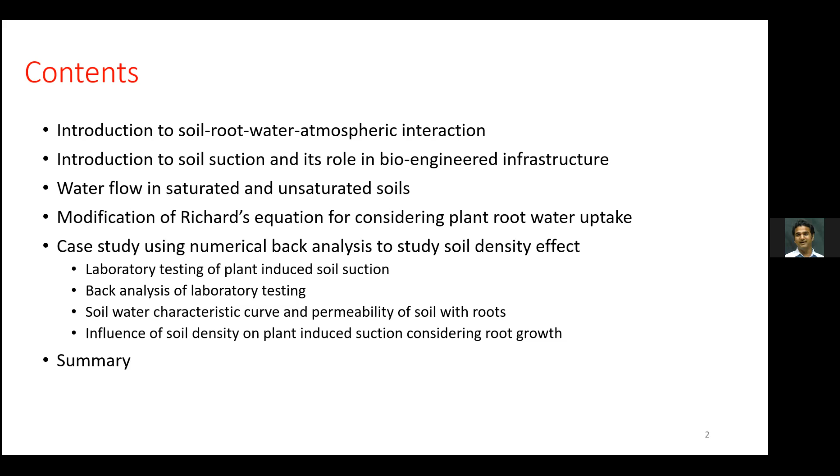Okay. So within this part, I will discuss about this numerical back analysis and a little bit mention about how one should be very careful when we conduct this analysis, and how we can obtain parameters which are not directly available, I mean, you can get it from literature. And then I will summarize my work. So in soil plant water atmospheric interaction, we are looking at how water flows in this entire system, including soil, then plant and atmosphere. So you can see vegetation through its transpiration can drive the water flow in the soils.

So if we look at this part,

Dr. Madhulisa. Yes. So the annotation is not allowed, is it? Annotations means like to use the pen or the marker. Okay, I can see here on the bottom.

Yeah, it's okay. Okay, so usually with this transpiration, what I was telling, this process is very important because we have all understood this process maybe in our high school or in biology class. So this transpiration is the loss of moisture through leaves, which happens in the atmosphere. And this transpiration creates a hydraulic gradient, which will help to move the water from, you can say, stem to the leaves, and then from root towards the stem, and from soil towards the roots.

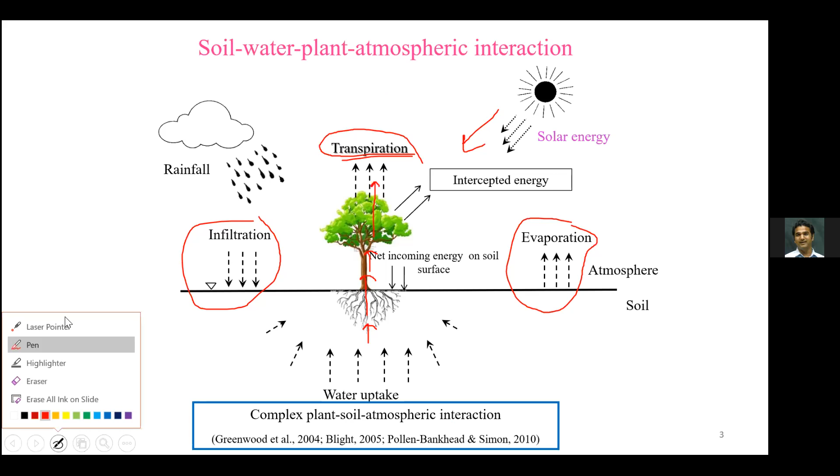Even in the lab, it's very hard to make a fully saturated specimen because we need to apply back pressure to remove any air or dissolved air in the soil. So that's why most of our soils in real life are unsaturated. And in unsaturated soil also, if you look at this part where the root zone exists, what we are looking at here is how we can model this interaction.

Okay, so people from agriculture have tried very simple root water uptake models to model how water will be taken by roots and will be lost to the atmosphere by transpiration. So in this root zone, how we model transpiration or root water uptake is something I will discuss in this particular lecture. And also we will go through some basic terminology, which is very important.

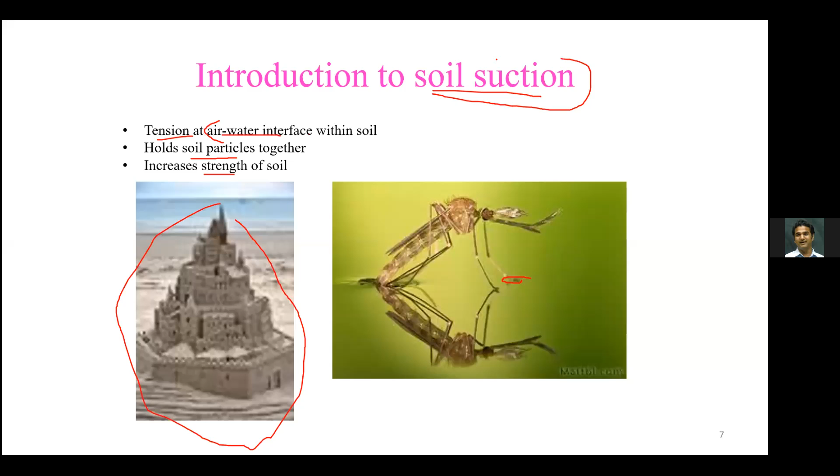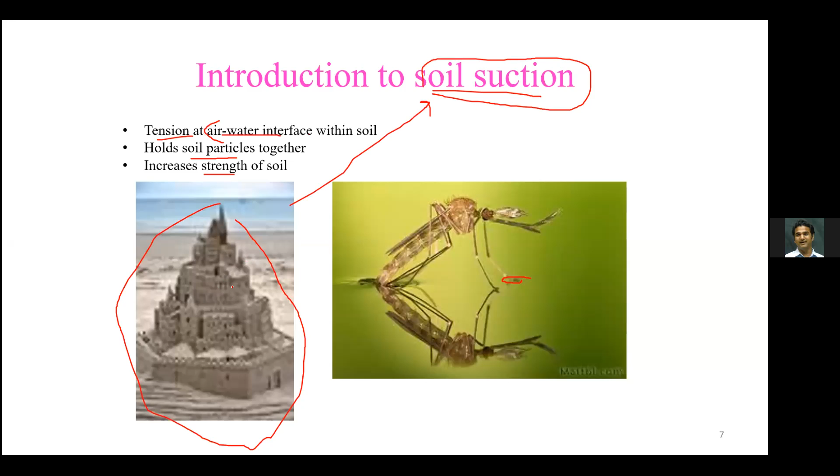A very classic example is the sandcastle. If you put a lot of water on it, it will collapse, right? Because as I said, the water which is required to make it 90 degrees or to make it strong is not the bulk water. It's this capillary water. Remember, this capillary water is something which is very, very important in our unsaturated soil mechanics.

If you read books from agriculture, soil science, geotechnical engineering, I can tell you all of them tend to use different types of words for the same thing. Like in agriculture, in hydrology, they will use pressure head, or they sometimes even say matric potential head. In agriculture, sometimes it goes towards this tension head also. Okay, and the units also change. Somebody represents in centimeters, somebody represents in kilopascal. In geotechnical engineering, we say suction. Okay, and we represent in form of kilopascal because we are engineers. But in agriculture and all represents in centimeters.

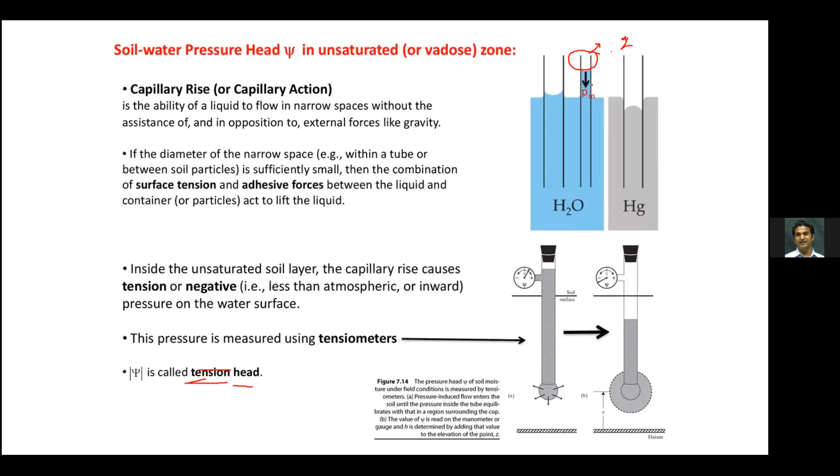So as I said, this sandcastle could stand because of soil suction. This is a very simplified form, for relating using this capillary model. I think you know this. The height of this water in this capillary tube, we can find it by using an equation, which we can say is the capillary model: 2 times tension into cos alpha, we assume it to be 1, divided by radius. So this radius you can assume to be equal to pore radius of soil.

And this has direct use in our unsaturated soil for estimating shear strength. So I think you are aware of the Mohr-Coulomb envelope. The shear strength you can calculate using c and tan phi usually, and your net stress. But when you have soil suction, there is an additional term which is added. There are terms which have been defined by Professor Vanapalli in 1996 and Professor Fredlund from 1995. They're both from Canada. Professor Vanapalli is, I think, an Indian, but he's in Canada. And I think they both were together in the same research group. So that's why you see very similar equations.

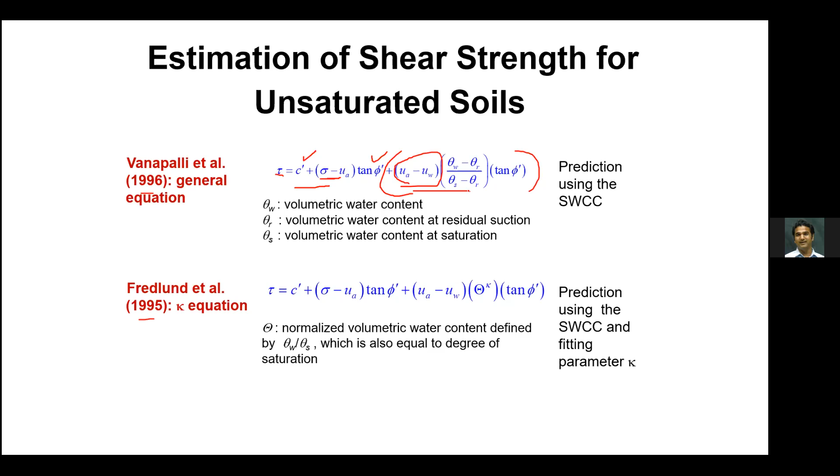So this equation also considers this term suction. So this term is also known as soil suction. And you can use this soil suction to estimate the strength. So you can see with an increase in suction, your shear strength will increase usually. And this term is not permanent. It depends totally on the soil suction which is present in soil. If your suction is zero, when soil is wet completely, if I use simple terms, then this additional shear strength becomes zero. You can also estimate permeability of soil if you know soil suction using this term. So these are all modifications from saturated soils to unsaturated soil, and this is important because we are looking at problems where we need to understand water flow in this zone, which is the unsaturated zone.

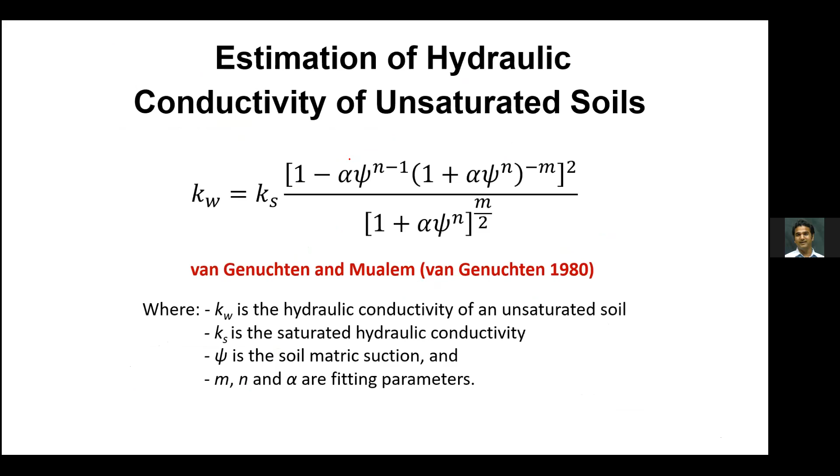Okay. So you can also measure matric suction in laboratory using several instruments, but in the field, we usually go for tensiometers. So this can measure reliably, you can say, from 0 to roughly 80. In the manual, it will be written 90 kPa, but even if you reach 70 or 80 kilopascal, you will see the readings are not reliable. Okay, so I usually use it from 0 kPa, or you can say plus minus.

Okay, so if we use this tensiometer, you can measure soil suction, but if the suctions are very high, especially in clay soils, or when your soil gets very dry, your suction can reach above 80 kPa. Then there are different sets of instruments that can be used. And this is also still a research topic, I would say. Till now, up to date, we don't have one particular instrument that we can use in the field to measure soil suction right from 0 kPa to maybe around 1500 kPa, which is the wilting point of the soil.

So we don't have this long range instrument yet, a reliable one. We have certain instruments which measure soil suction indirectly, or you can deduce it, but it's not very reliable. Okay, you need a lot of calibration. So this is also a research topic which is still in progress, I would say.

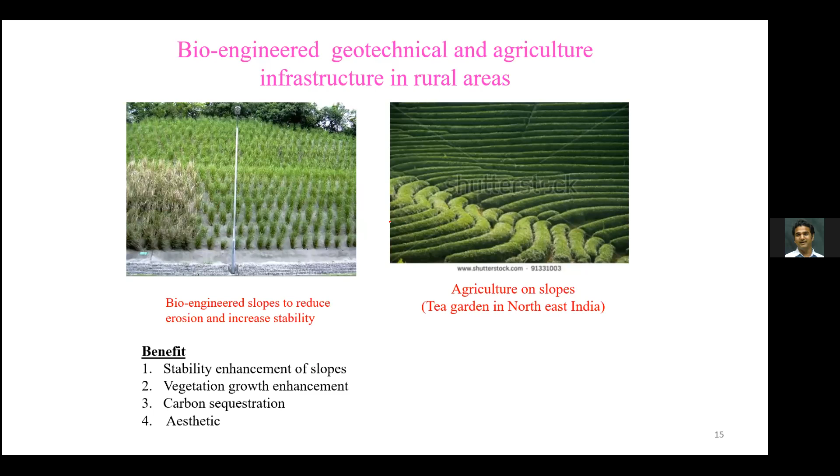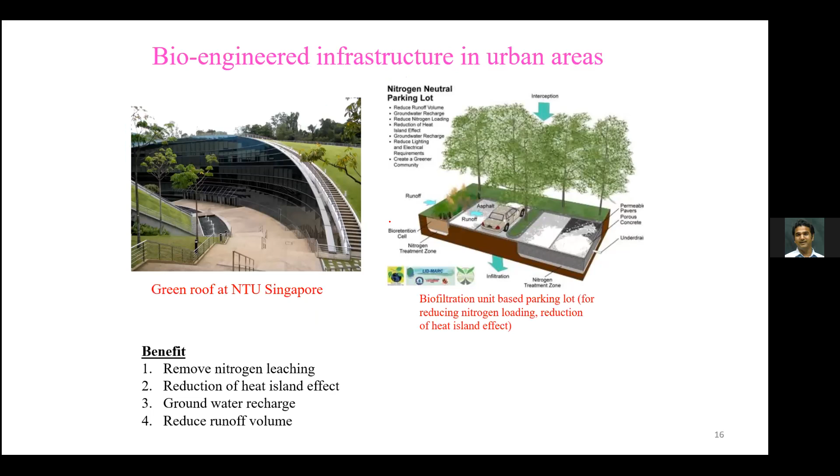Okay. Applications, I think, especially in many hill slopes, or these days in slope remediation, they are trying to use mixed methods where they are also using nailing or concrete mixed with vegetation. And also universities are promoting use of vegetation in a more scientific, more engineered way to stabilize slopes, also provide aesthetic value, and also for water filtration.

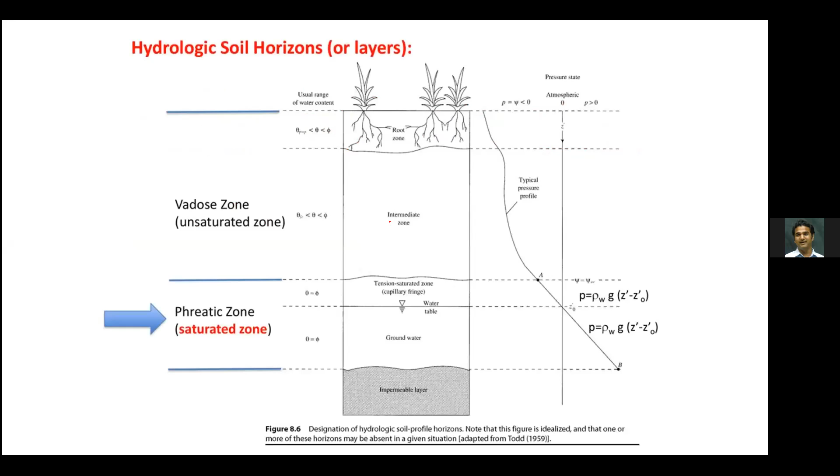Okay. So to understand water flow, we will first go through various models which have been developed. I think in undergraduate we have seen Richards' equation and Darcy's law. So the law governing the water flow through porous medium was discovered by Henry Darcy, a very famous French engineer. I think this equation is well known to most of you.

So if we consider a small soil element and assume it's a homogeneous and uniform element, the water flow through this element can be calculated using this equation, where Q is the unit flow rate, K is the permeability or saturated conductivity, and this term is very, very important. I think this is somewhere where many of us get confused: it is the total head gradient. So this term is not only the pressure head gradient, but it also includes the gravitational head gradient. So remember, this term is the total hydraulic head gradient.

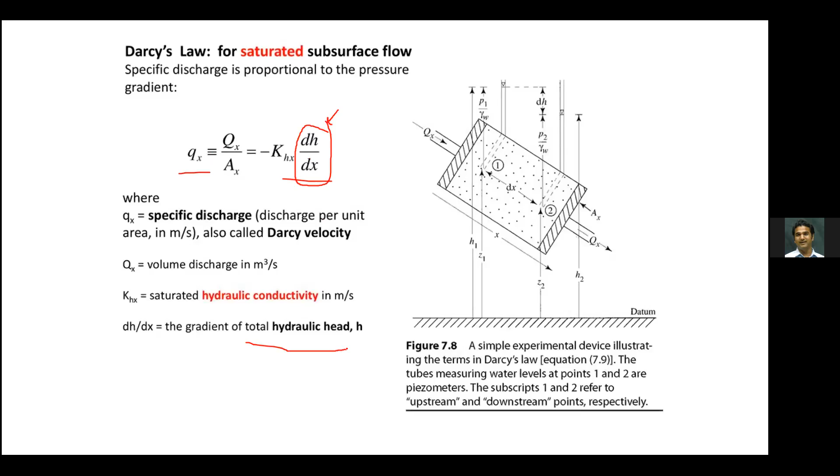Okay? And when we calculate the total hydraulic gradient, it includes gravitational head and pressure head. This is pressure head or suction head, which I was talking about. So we use both gravitational head and pressure head. So it's always better you call it total head. Okay, so you will not get confused. So that water flow rate we can measure using this equation.

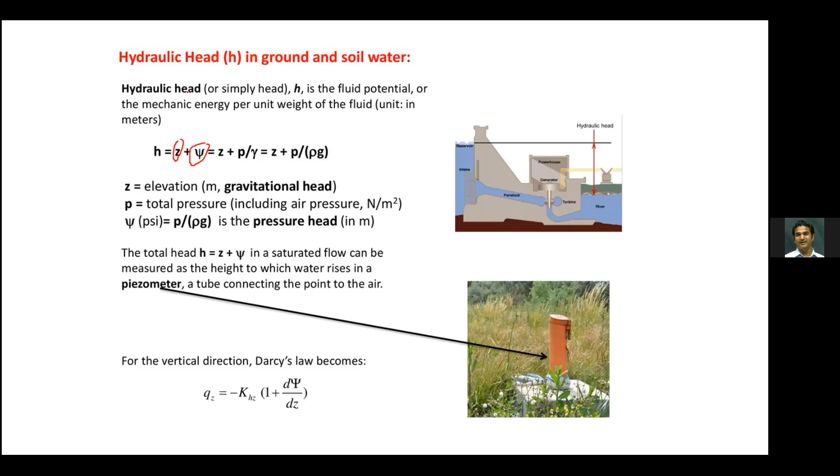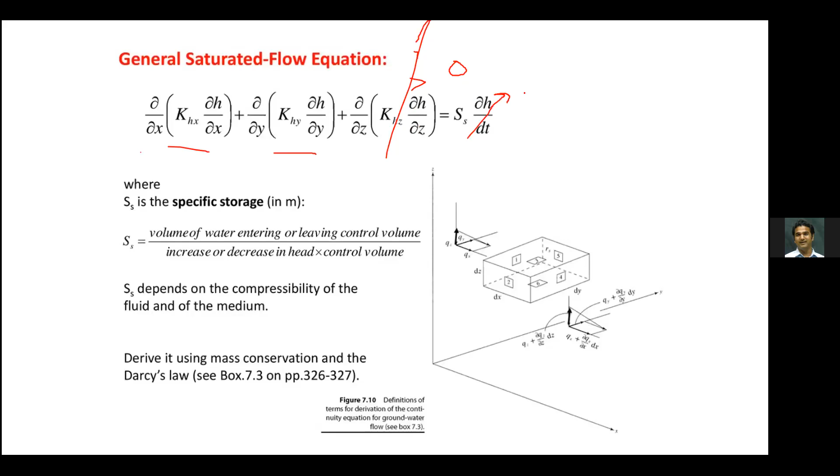Okay, and then there's an equation which can be used for steady or transient flow of water in saturated or unsaturated soil. This is a very general equation in 3 dimensions. So in most of the studies, we actually go for 2-dimensional. I would say even simpler studies are there for 1-dimensional. So this term we neglect always. We assume that the water flow in 2 directions are similar. So in steady flow rate, on the right hand side, the storage will become 0. Okay, so there is no additional storage of water.

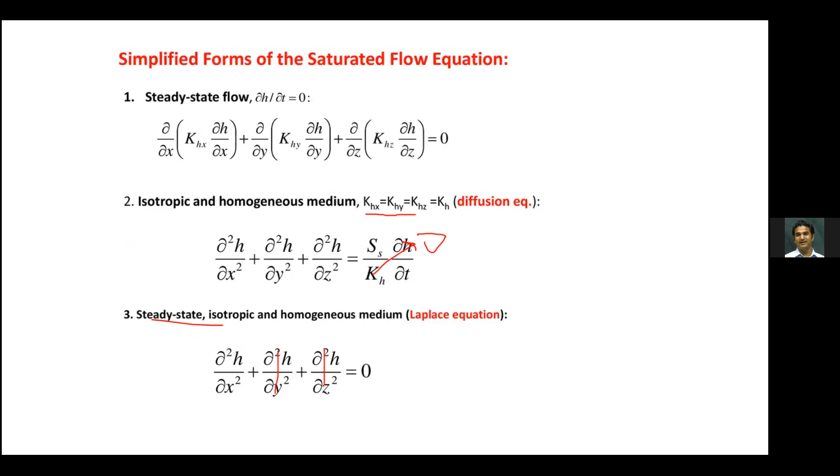In isotropic and homogeneous medium, your permeability in X, Y and Z direction are similar. In steady state isotropic permeability, in homogeneous medium, this term also becomes 0. So you have this term. So remember, in these terms, there is no consideration of vegetation yet or root water uptake. Okay, and if we consider all flow in only vertical direction, then these 2 terms are also 0. Okay, so then you get a simple term like this.

Okay, so now before we go into detail of how to implement, we'll try to understand what is the soil water characteristic curve. So every material, it's not only soil, it can be any porous material, has a characteristic curve. Even our towel. Okay, we use a towel every day, and that towel also has its own characteristic curve. Any porous material has its characteristic curve. Okay, and it's a kind of material property, you can say, in very simple terms.

Okay, let us consider a very wet soil or a very wet towel. In a very wet towel, your water content will be very high, right? So in that case, most of the water will be bulk water, and the amount of capillary water may be very negligible. If your capillary water is negligible, you can assume your suction is very negligible, right? Your suction is very less because your capillary water is very less when your towel or soil is very wet, right?

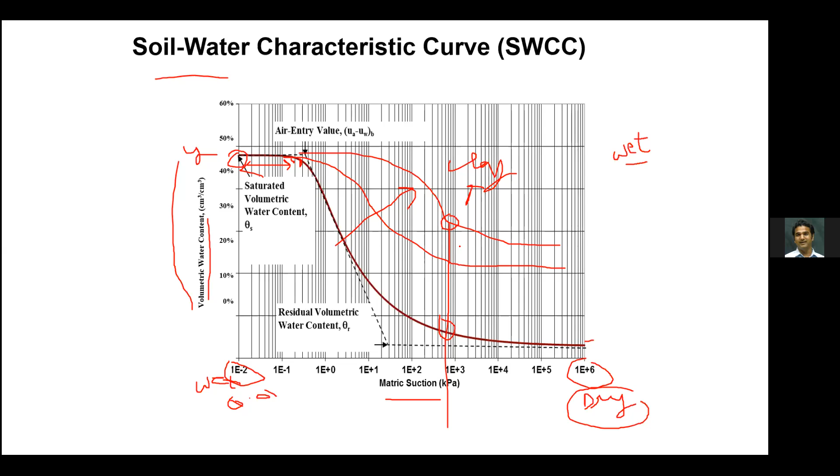Similarly, even napkins or tissue papers or towels also have their own characteristics, and you can determine a similar characteristic curve if you want. And as I said, clay usually has higher water retention as compared to sandy soils. Okay, so you can see the unit here.

This graph is taken from literature in agriculture. They prefer to write in pF units or centimeters of pressure head. But don't get confused, the meaning is the same. You can even convert this into kPa, kilopascal.

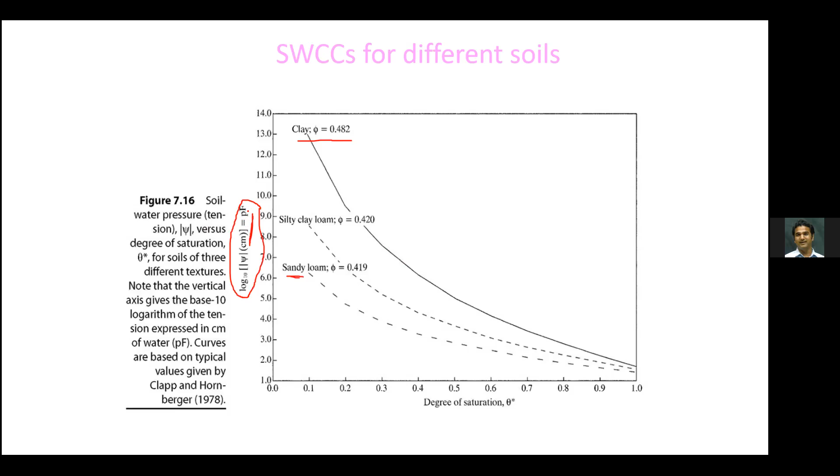Okay, so this is the general equation, we call it the Richards equation, for water flow in unsaturated soil. We can modify it, as I said, using this equation. We modified it by adding a sink term here. Remember, this term represents a change in water storage. So if you add a sink term, it means you are subtracting water: this amount of water change with time represents the amount of water which has been taken by the plant.

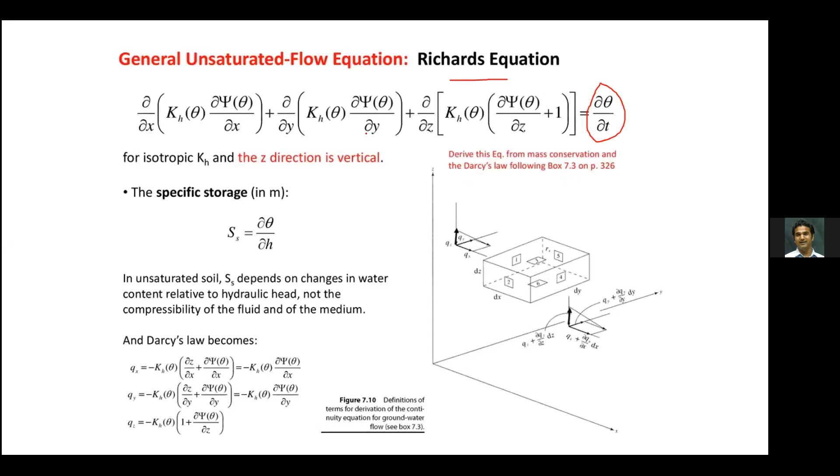So if you subtract a sink term from it, this sink term represents the root water uptake. We apply this sink term in a root zone, in the soil. And this sink term represents the amount of water which has been taken away by roots from the soil. And this sink term has been defined in literature as a function of three parameters.

The first is alpha, or you can say transpiration reduction function. It's a function which is dependent on soil suction. The second term is root distribution. Of course, we also need to see how roots are distributed in the soil. Sometimes in some plants, most of the roots are present near the surface as compared to deeper depths. Then the third one is transpiration rate, which is dependent on climate or atmospheric parameters.

So the first term helps us to understand how the sink term is dependent on the state of soil. If your soil is very dry, your plant may not be able to take enough water. They will take some water, but very little. So you need to regulate this term, and you need to have a very good function. In very wet and very dry states, your root water uptake will be very low, but at optimum water content of soil, your root water uptake is good. So this term will help to take care of it.

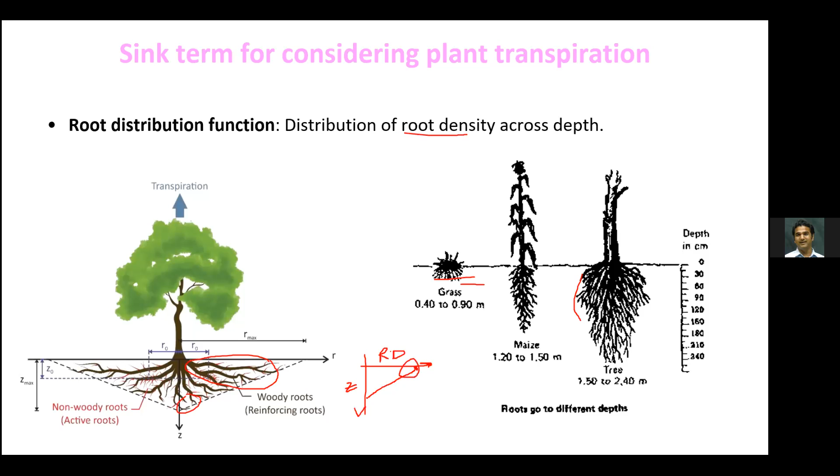So if I plot a root density distribution, it's a distribution of root density across depth. You can imagine your density is higher here, and then your density is reducing. So this is Z, and this is, suppose, root density, I can say RD. It will reduce with depth. So it means your water uptake is more likely to be higher near the surface as compared to very deep depth. So this will affect modeling. This will help us to take care of the root distribution.

The third one is the atmospheric parameter. I'm not going into it today because I think it's very easy to understand that atmospheric parameters will impact transpiration rate. And there are many models in literature which take care of that particular function. Mostly we use the Penman-Monteith equations. And we also determined the root area distribution for very small trees in the lab. So we found that the function varies more or less like a parabola.

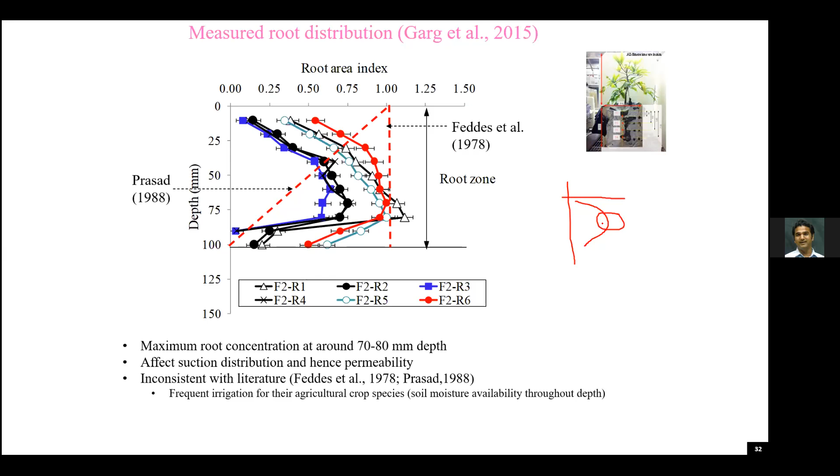So there is a certain depth at which your density of roots is maximum. It's neither near the surface nor at very deep depth. So you will expect more water to be taken up at this particular depth. So this was all about, I went into the basics of how we consider in a Richards equation a sink term, that can consider these three types of functions.

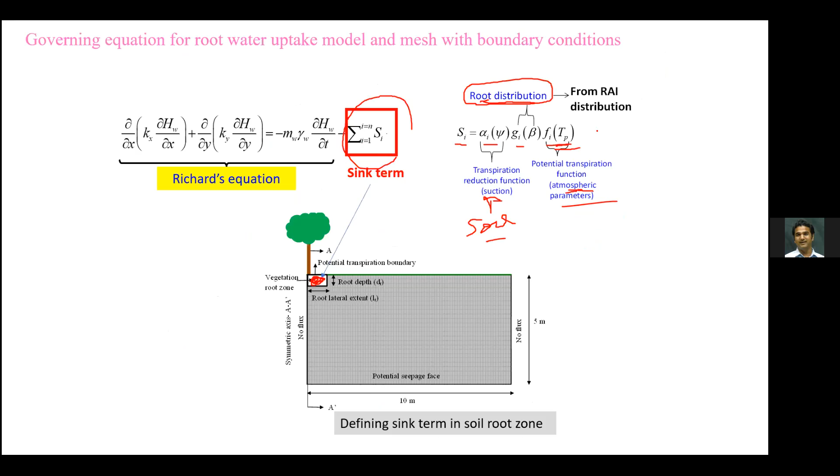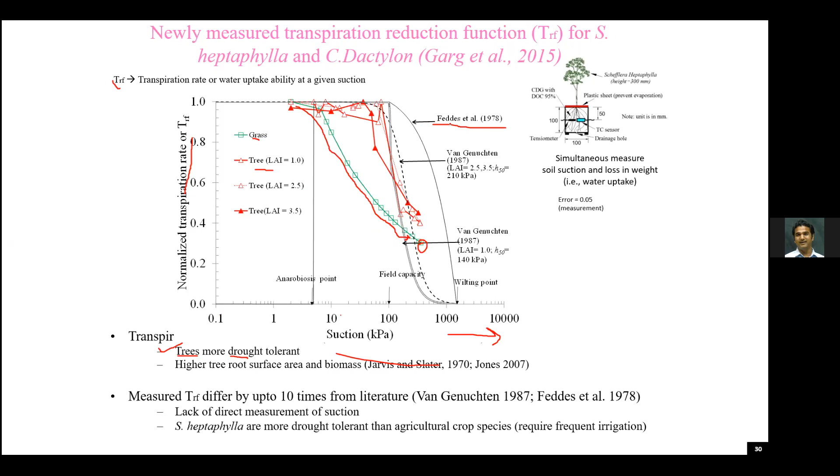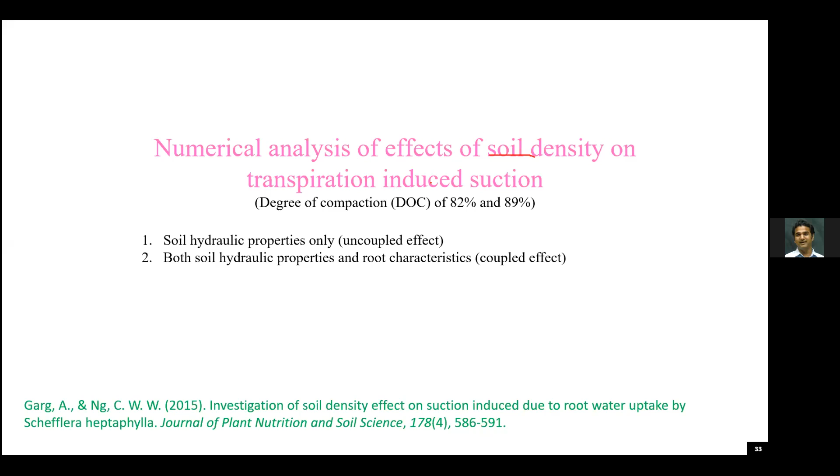And to give you more idea, this function has also been used before, just in 2020. It has been used by researchers from the Chinese Academy of Sciences. They have used our model to develop their model for landslide prediction, and also they have done prediction. So this model has been used already in 2020 by other researchers, which we developed in 2015. Now I will discuss the case study where we used these parameters and also modeling of root water uptake to understand how soil density affects transpiration-induced suction. This has been published in the Journal of Plant Nutrition and Soil Science in 2015.

Okay, so our hypothesis was like this. If I use this slide in a very simple way, we know soil compaction will reduce pore size and can increase your water retention in general and induce suction. So this is our engineer's perspective. And also an increase in compaction will increase the strength of soil. So we engineers like it.

But at the same time, we have to think from the plant's point of view, because if we are going for man-made slopes or bioengineered infrastructure, we need to consider the long-term perspective of vegetation. This can hinder plant growth and also root water uptake. This is more of a biological perspective. Then, since this will influence both of them, what is the coupled effect? On one hand, it's increasing strength from the soil perspective, but on the other hand, it is also influencing plant growth, which can reduce soil strength in return. Because, as I said, your shear strength is a function of c, phi, I mean cohesion, then friction, then also another term is suction, plus root reinforcement. So if you hinder plant growth, your reinforcement strength coming from roots and also from soil suction may be reduced, we hypothesize.

And this may further influence your strength, overall strength, rather than looking only from an engineering perspective. So for this, we did, I mean, this is one very simple flowchart. I think it's very important for numerical procedure and also back analysis.

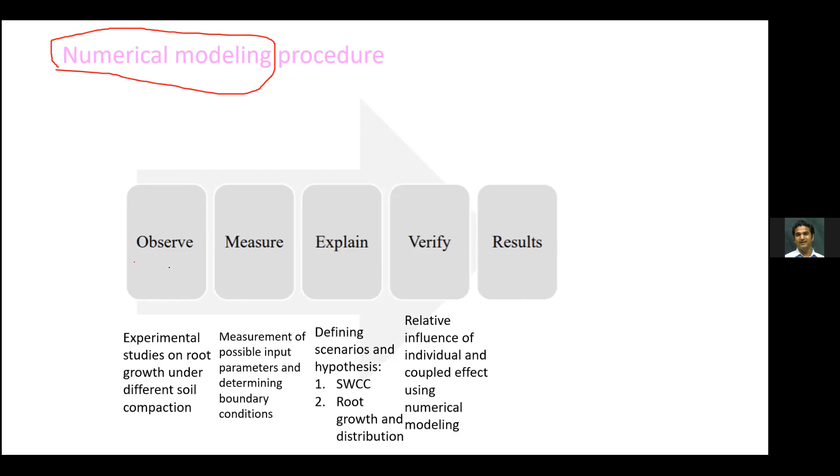The right way is, as I said, in forensic analysis, they go back, they call it numerical back analysis. They go back to the site, get the soil parameters, get everything from the site, your boundary conditions and all. Most important are the in situ parameters, not only laboratory parameters, but in the site, in the field. And then you need to think about certain mechanisms or failure modes, and from that perspective, you model it, okay? So observation is very important first. Second is measurements. Measurement of whatever input parameters and boundary conditions is very important. Then you need to think about certain scenarios and hypotheses, what you expect.

So as I said, in compaction, the soil influences root growth. And what I expect is maybe this influence of number 2 will be more dominating as compared to number 1. So I expect it may happen, and then I will use numerical modeling to verify it. How will I verify? I will give certain scenarios and then try to understand what happens in the different scenarios. Okay, so this is the main purpose of numerical modeling.

What we use when we say prediction are called class A predictions. I have not written it here. Class A predictions means you have no idea what the settlement of this foundation, for example, is going to be, or what the failure mode is going to be. You just use the input parameters you're given and whatever you get, and you have boundary conditions, and you just do modeling as a typical modeling procedure. Whatever calculations you get are called class A predictions. You don't know whether it is right or wrong, because you just use the parameters available and predict.

In numerical back analysis, this is more like a class C prediction, we say. In numerical back analysis, we actually have to validate our model, which is very important, and after that do the modeling procedure. And in forensic analysis, it's very important again to consider uncertainty. I have not done it in this lecture, but just for your reference, you need to consider uncertainties in the properties of soil, whatever you're measuring, and also in the governing equation of the numerical model. All these things have to be considered. In other words, your research methodology should be very rigorous if you want to go for forensic analysis. That's the whole idea behind it.

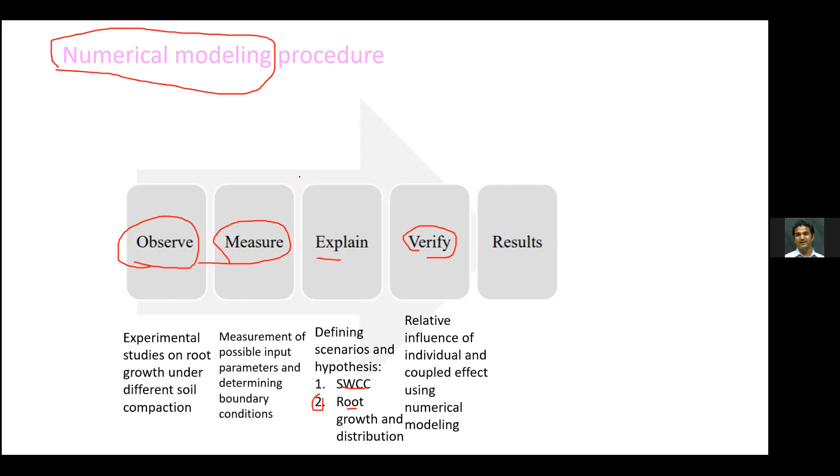Other things are more or less fundamentals that we need to follow, whether it's geotechnical engineering or structural engineering. Most importantly, I think, is the right research methodology that is needed. So as I said, we need to have different scenarios.

So in our case, we took three scenarios. We think maybe soil compaction only influences soil properties. So this is scenario one, and in scenario one we have three different analyses. In scenario two, we assume the soil compaction only influences root characteristics. In scenario three, we assume their coupling, which is more realistic.

By comparing results from these three scenarios, we can find, first of all, the individual effect of compaction on soil and also on root water uptake, then the individual impact of compaction on root characteristics and root water uptake, and then the simultaneous impact. So I have designed three different cases. These two you can call hypothetical scenarios. In real life they may not exist, because in real life scenario three exists. This is just to understand the difference between individual and simultaneous conditions of compaction.

And there are two sets of parameters: soil and root parameters. For root parameters, to understand the soil density effect, we inferred from literature; I will show you later. For loose soil, the soil which is very loose, we idealize that roots will be more or less uniform, because it's very easy for roots to grow in different directions. But when your soil is very dense, you will see more roots near the surface and fewer roots at deeper depths because there will be resistance. So in soil with higher compaction, the density of roots is higher at the surface. This is the idealized case we inferred from the literature.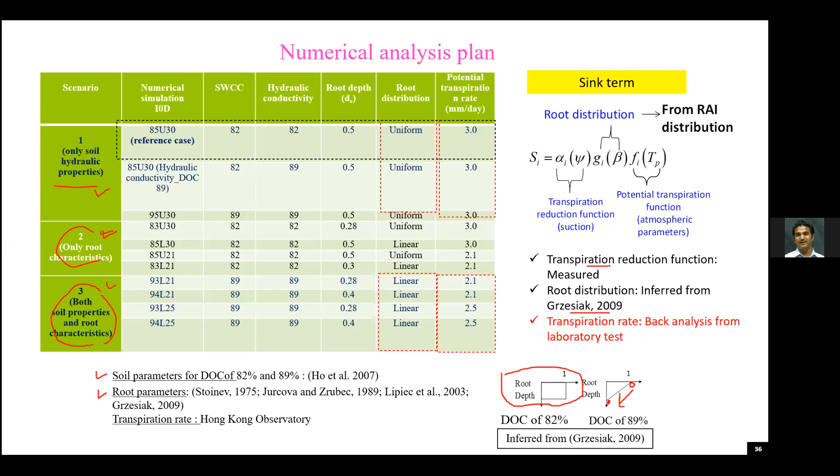The transpiration reduction function, we measure it, and the rate, we analyze it. This is the equation, I think you already saw it before. This is the measured function, and this is the idealization. In loose soil, we assume that roots are more or less uniform up to a certain depth, and of course after that it becomes zero. This is a very idealized and simplified case. If your degree of compaction is higher, you can assume your roots are mostly near the surface, and then it reduces: longer roots, then shorter roots, then shorter roots like this. You could also use a parabolic or non-linear form, it's up to you, but for simplicity we just use linear decreasing. This is how we infer from literature.

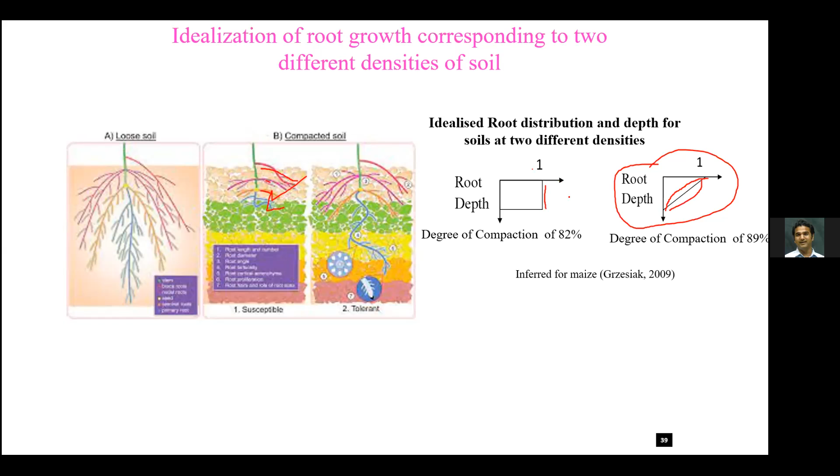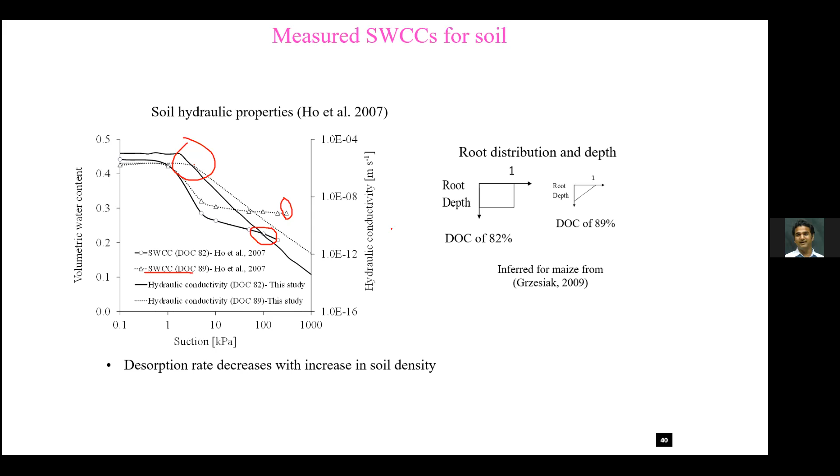We also use the SWCCs of soil with different compaction. This is at 82% degree of compaction, and this is at 89%. You can see when your compaction is higher, your initial water content is less, but when you go to the unsaturated state, the highly compacted soil has more water content because the pores are very fine. You can see the permeability changes also. When compaction is higher, of course the saturated permeability will be less, while loose soil has higher saturated permeability than dense soil. We know it. But in the unsaturated case, it's opposite. Because of the presence of air, the unsaturated permeability may become different or opposite in loose and dense soil.

And for the back analysis, we did experimental testing in a control room in Hong Kong. We designed these experiments to measure plant transpiration rate, which we calculate using water balance, and we also measured soil suction. This sensor I was talking about is for light radiation. This sensor is for suction measurement from 0 to 80 kPa. And this sensor we call a heat dissipation sensor. It estimates suction, not directly measures it. It gives you an idea of suction using the thermal change, the temperature change, in the soil.

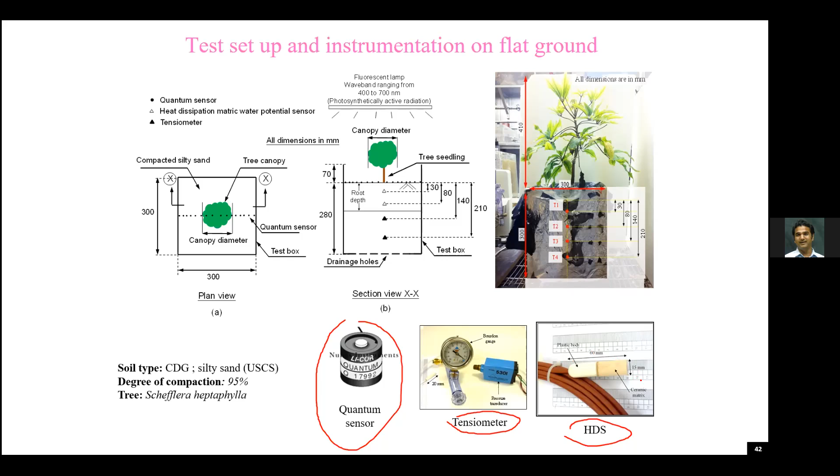It will release some heat, and the temperature change in the soil will depend on thermal conductivity, which in turn depends on moisture content. So it's an indirect measurement of soil suction if you want to measure suction beyond 100 kPa. Within 80 kPa, we use the tensiometer, which is more reliable, I would say. And we validated our transpiration rate based on the suctions that we measured in the lab. This was very important. Same thing in forensic analysis: numerical validation of your model is very important.

Okay, that's the only way of validation. And you can also validate either with field measurements or with laboratory measurements. My suggestion would be to go for laboratory because it is simpler and easier to control.

In field measurements validation, you can do it, but you never know whether it is by luck or is it really true validation. In the field, there are a lot of factors affecting, and maybe one factor can subtract the influence of another factor. So validation of measurements in the field is more difficult. And even if it becomes true, you don't know whether it is real or apparent. So I suggest for all the modeling, it's better to do it with the lab.

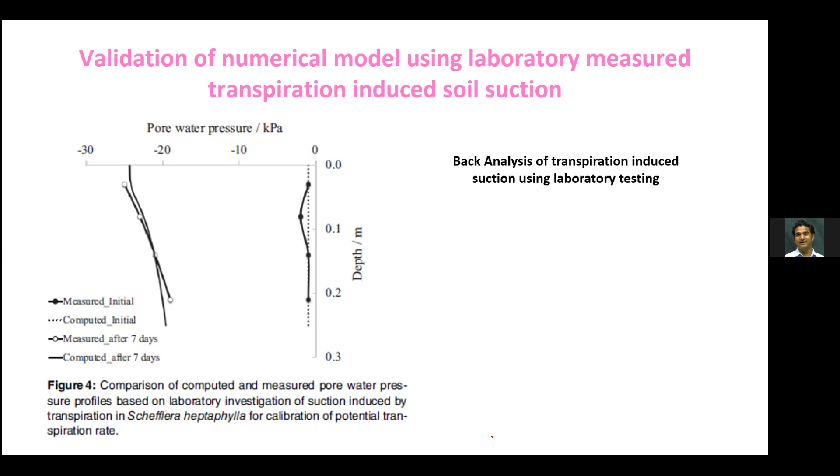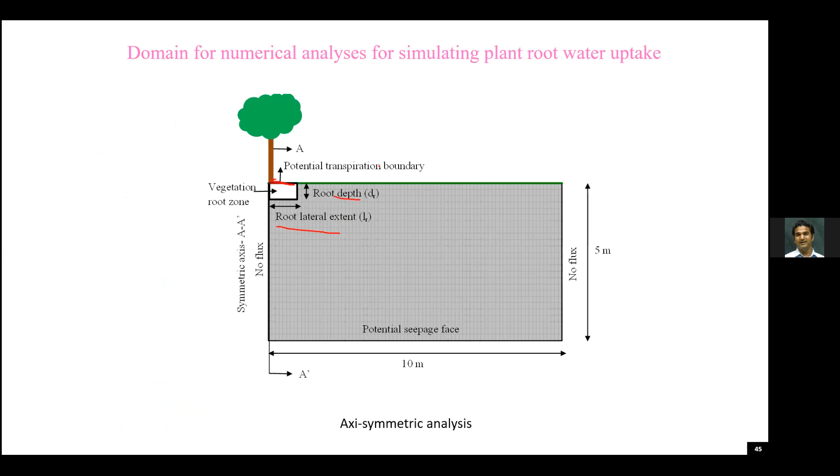So it's a typical procedure for numerical modeling. Here they have not written it, but validation of the model is very, very important. Okay. So after validation, we consider the domain, a ground with the axis, we consider axisymmetric analysis with the tree planted, and we assume a root zone of root lateral length LR and depth dR. On this boundary we specified a transpiration rate boundary. We assume the evaporation effects are negligible. We use a steady state initial condition first, and then we consider a drying period of at least 10 days.

Okay. So our results consider individual and couple effects. This is a typical pore water pressure profile, or suction profile, you can say negative pore water pressure. This is the initial condition. This one is the condition with uniform root distribution. This is more or less the individual impact, hydraulic conductivity only. This impact considers both SWCC and hydraulic conductivity, at two different densities, 80 and 90%.

Okay, so if you can see here, on this curve the influence zone is much higher, longer. And for these two cases, the difference is in hydraulic conductivity and SWCC. So if you consider the impact on SWCC, you can see that your suction gets reduced quite significantly with the increase in compaction. Here your hydraulic conductivity corresponds to higher compaction. When your hydraulic conductivity reduces, your water flow will not happen much, and the suction reduces quite significantly. In 90% compaction, if you see these two cases, near the surface there will be a difference because of hydraulic conductivity, but if you go to deeper depths, this case has less suction as compared to this case, 80%.

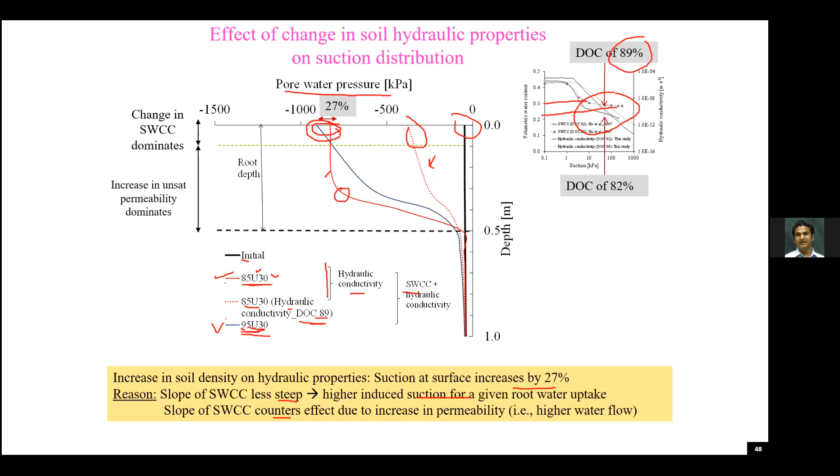The moment you consider the density effect on hydraulic properties, the slope of the SWCC is less steep, giving higher suction because of root water uptake. In these two cases, the moment you increase compaction, your slope becomes very flat. So if you reduce water content from, suppose, this to this, the increase in suction is much higher for higher compaction. That is why you see a much higher increase in suction for this last case, because you also need to consider the slope of the SWCC. These two cases represent the effect of compaction on hydraulic properties only.

Here you have to consider root depth. Once you consider the effect of compaction on root characteristics, you see your variation lies here. If you consider only the soil case, like scenario 1, this is scenario 1, and this is scenario 3. Remember this coupled effect. You see your suction reduced quite significantly. So it means in the long term, higher compaction may not be very beneficial for increasing soil strength because you are limiting plant growth, you are limiting root water uptake, and you're limiting the transpiration or plant-induced soil suction. That may be very important for the long term, especially for shallow slope failures.

And that's where, if you have to go for man-made or engineered slopes, maybe we need to consider an optimum density, or maybe we need to consider specific vegetation which can tolerate higher compaction resistance. So to summarize, this change is something we had as a hypothesis, and the main reason is the reduction in root depth and transpiration rate with compaction, which counters the increase in permeability.

So this coupled effect shows that it's not really advisable, because if you consider the compaction effect on hydraulic properties, it helps us in compaction and also in increasing suction. But the moment we consider the plant effect due to compaction, our induced suction becomes lower. And this is because of the decrease in root depth and also root distribution.

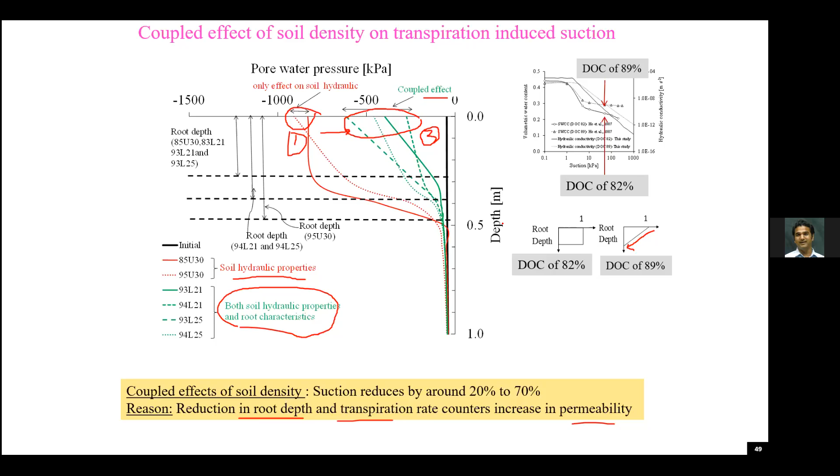As I said, in high compaction, your roots are not uniform like this. Your root density reduces with depth. So you need to take this into account. So in summary, your root water uptake induced suction can be modeled using Richards' equation.

So even for forensic analysis, if you want to go for numerical back analysis, we need to measure soil-specific or region-specific plant parameters. Even if we infer them from literature, we need to justify it properly.

A contrasting trend of suction was observed, as I said, with and without considering the influence on root characteristics. Your suction increases quite significantly if you don't consider the effect of compaction on plant growth. But if you consider the effect of compaction on plant growth, then you need to be worried, because your suction will reduce quite significantly here, and so will your soil strength, if you consider the coupled effect.

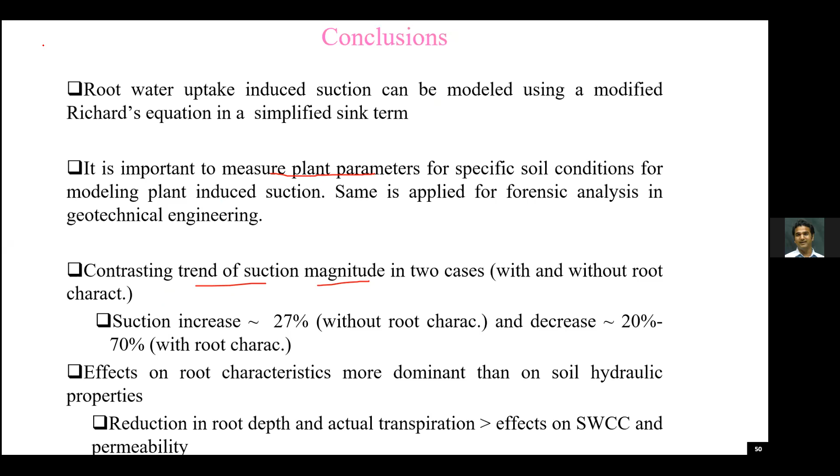So thank you so much, Dr. Ankit, and thank you for your wonderful and valuable lecture. It was really very interesting. Now the participants, you can ask your questions if you have any. Any questions from any other participants? Any questions from the participants? I think all the topics were discussed very clearly, and they also understood. I think they don't have any queries.

Okay, sir. It is an honor for me that you are part of this FDP as an expert speaker, and thank you so much for accepting the invitation. Thanks a lot. Thank you, doctor. So with this, sir, we come to the conclusion of this session 40. I thank you all for your valuable presence and for your patience in listening. And now I request you all to kindly switch on your camera for one group photo. All of you, please switch on your video. Okay, thank you so much, sir.